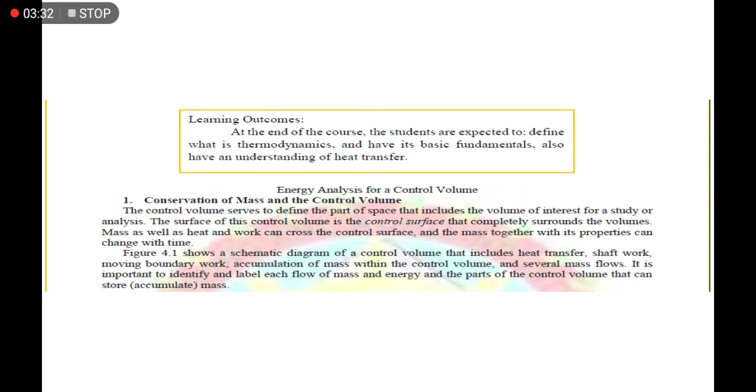So as you can see here, before we tackle those topics, we have the conservation of mass and control volume. We have to differentiate between the conservation of mass and the control volume, because they are different from each other.

So here, as you can see, we have a system or schematic diagram of a control volume showing mass and energy transfer. As I have said, we are talking about a flowing of mass, but we cannot actually have the flow of mass if there is no change of energy, or transfer of energy.

That's why here we are also talking about transfer of energy. As you can see here, we have different types of instruments being used in these diagrams. We have the steam expanding against a piston, an accumulator initially evacuated, and we also have heat transfer. So this would be an example of flowing of mass, and at the same time, transfer of energy from one phase to another.

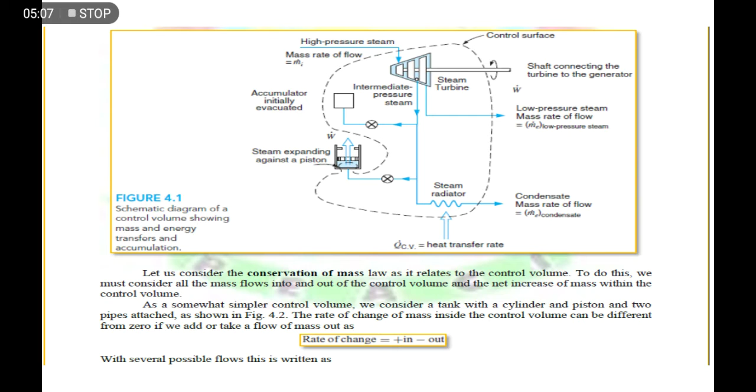So we have an equation here. We have a rate of change which is equal to positive if the change is flowing into the system, then it is negative if it is flowing out from the system. So then if we have

different types of mass, if we have masses that flow in and flow out of the system, we have to use this equation number 4.1. We have the average of the mass that is conserved is equal to the summation of the rate of mass entering minus the summation of the rate of mass exiting or moving out. So we have an equation for this too.

We have this mass of the control volume, which is equal to the integral of rho dv. Why rho dv? We know that rho here is the density, mass density of the system or the fluid that is flowing, and we manipulate that equation to get the

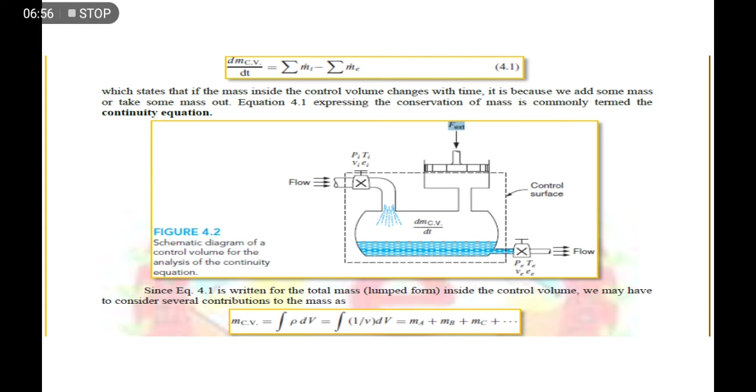conservation of mass. So we have the integral of rho dv, where rho is mass density. Then we know that rho is equal to the inverse of specific volume, 1 over v, that is specific volume, multiplied by dv. Or we can also say mass of A plus mass of B plus mass of C, or the summation of the masses involved in this system, looking at this system.

So one example of movement of mass is this figure 4.3. We have a valve here, we have the velocity of the mass entering this pipe, then we also have the fluid flowing out. As you can see here, since most of our calculations on these topics are mostly concerning neglecting the frictions, that's why here we neglect the friction that can oppose the flowing of the fluid, as shown in our figure 4.3.

The volume flow rate of fluid is equal to the volume, which is the velocity times the area. When you multiply velocity times area, you get the volume flow rate, which becomes meter cube per second. So that's why our formula for volume flow rate is velocity times the area.

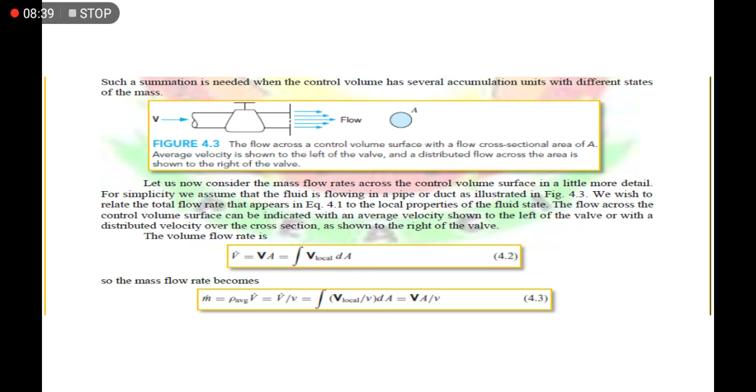Now the energy equation for control volume: energy 2 minus energy 1 is equal to the transfer of heat from state 1 to state 2, minus the transfer of work from state 1 to state 2. That's actually the energy equation we used in our previous topics, but we have to manipulate it, since this equation doesn't include the movement or the energy used by the moving fluid, and the energy that is being converted.

That's why in equation 4.4 we have to derive some expressions including the change of transfer of energy and the change of mass. The derivative of conservation of energy with respect to time is equal to the rate of flow of heat minus the rate of change of work.

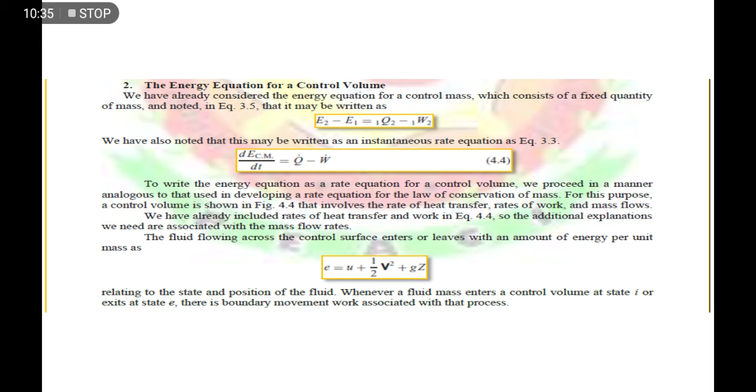Please remember this equation. At the same time, this energy equals internal energy plus one half V squared plus gz, that's the unit energy. We divide it by mass to remove the mass from one half mV squared, so it becomes one half V squared, and from mgz, so it becomes gz.

So as we can see here, the rate of flow work is actually equal to the force times the velocity of the changing fluid.

Equating the equations above with this energy equation, we have E plus PV equals U plus PV plus one half V squared plus GZ. We introduce a variable or specification involving here in thermodynamics, which we call enthalpy. Enthalpy is H, which is equal to internal energy plus PV. We already introduced that in our previous topic.

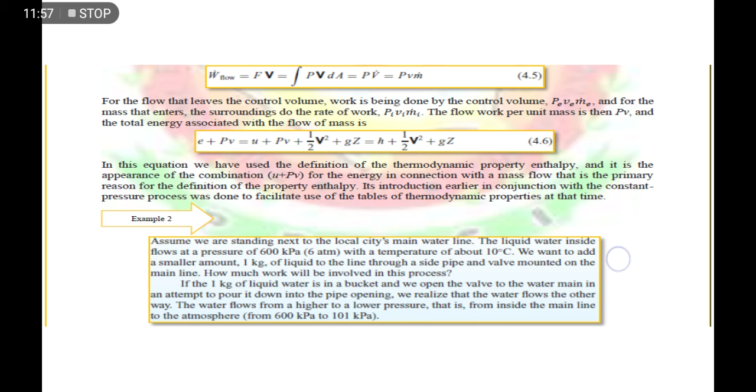So therefore it's equal to H plus one half V squared plus gZ. So we have this total energy equation, e plus Pv for changing of volume. Please read example number 2 also, it's easy.

Taking the derivative of the total energy equation, equation 4.4 becomes this. We have mass flow rate times the energy involved, with entering and exit terms, the change of energy flowing in and the change of energy flowing out. So everything is there - this is our most important equation.

Taking out the parameters that are entering and exiting or flowing out, we have the total equation here below. As you can see, we separate the quantity due to entering of the fluid, and then the quantity due to the flowing out of the fluid.

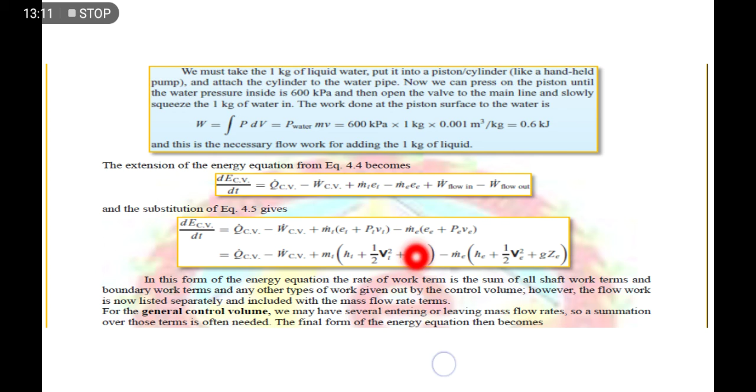If this summation is due to, since we have systems involving many flowing in of the mass, that means there are many entering spots where external mass can flow into the system, we have to take the summation of that entering quantity of fluid. That's why the derivative of energy conservation equals this equation, equation 4.7.